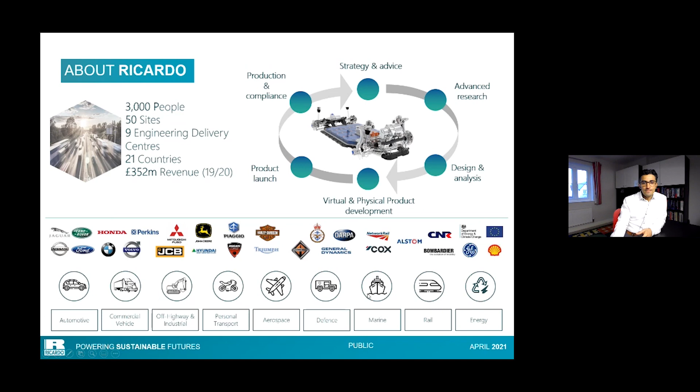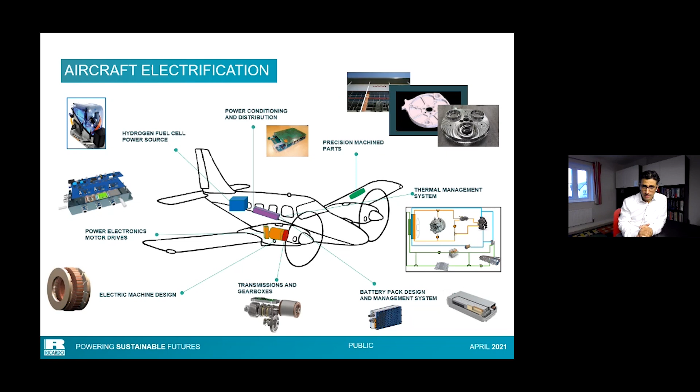Thermal management is very important, and I'll explain why that is in a few slides later. And the machining and manufacturing of precision parts that go into mechanisms that move the various flaps and ailerons and so on.

Why has this need arisen, and why now? We saw the car industry doing it in the mid-noughties, so that they could launch vehicles in the early 2010s with the Nissan Leaf and the likes. So what has taken a little bit longer for the aerospace industry to get on board the electrification bandwagon?

Part of the reason is that the components were not there at the time, but they are there now. There's government policy about limiting emissions that impact global warming, and more localized government policies around how we transport people. Some countries have banned short flights if there's an electrified train route, and as a result, some airline operations are quickly starting to invest in electric air mobility solutions. Aviation emissions account for 3% of CO2, but more like 5% of combined global warming effects once you include NOx emissions and contrails. And because they're at higher altitude, they may have a more severe effect on global warming than emissions at ground level.

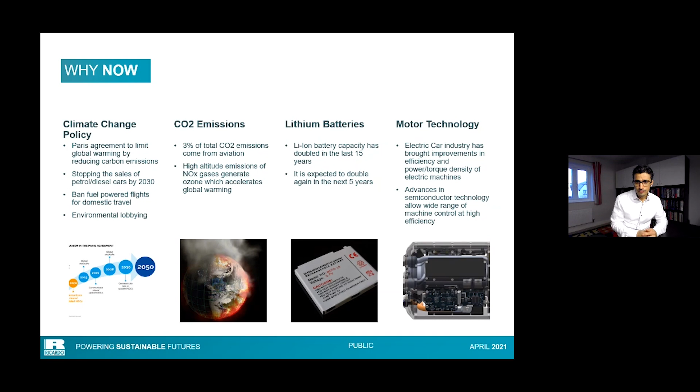The other thing that's happened is the motor technology and the power electronics to drive it. We've seen a very sharp increase in power density from those industrial motors that are the workhorse of our industries - bulky machines but reliable. When the car industry started electrifying, there was a big drive to pack more power into smaller volumes so they could fit as a hybrid or standalone electric vehicle. Initial aeroplane prototypes used those motors, sufficient for demonstrator flight. But since then, motor design has taken a tangent away from automotive designs, and now we're packing more power into a very small volume and weight - double the power density compared to a car motor.

The car industry is now going in a different course because they're more concerned about cost and security of supply for those motors, whereas the aerospace industry is more concerned about taking off the ground - we need light equipment, packing a lot of power into a small volume and small weight. All of those factors have now coalesced into the situation today, enabling the creation of electric aircraft and supporting the business case for electric aircraft operations.

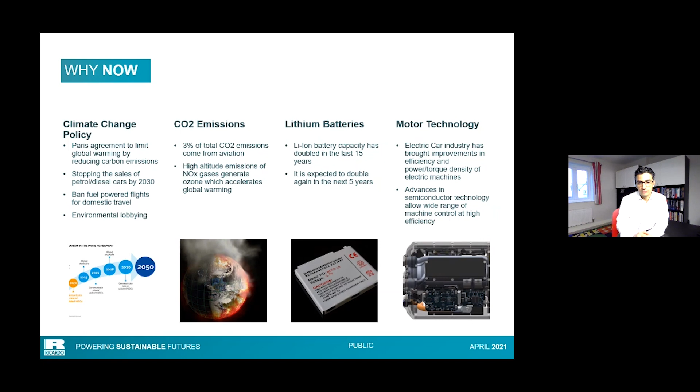So what is happening? Roughly speaking, initiatives can be broken down by range. We have urban air mobility, UAM, essentially transporting people within the bounds of a city or dense populated area. Think London with a number of hubs or vertiports - a hub at London Heathrow and one at central London. You get an urban air mobility air taxi that takes you from Heathrow to central London in about 5 or 7 minutes, compared to a train that takes 30 minutes or so. That's the general concept of urban air mobility.

Sometimes they call this advanced air mobility, because this type of aircraft can change from vertical lift into horizontal flight, using wing shape and aerofoils to create lift and lower the power demand on the battery and motors. Those are able to travel further distances, covering distances between cities - they call them intercity aircraft. Then we have regional aircraft that cover roughly a range of 300 miles.

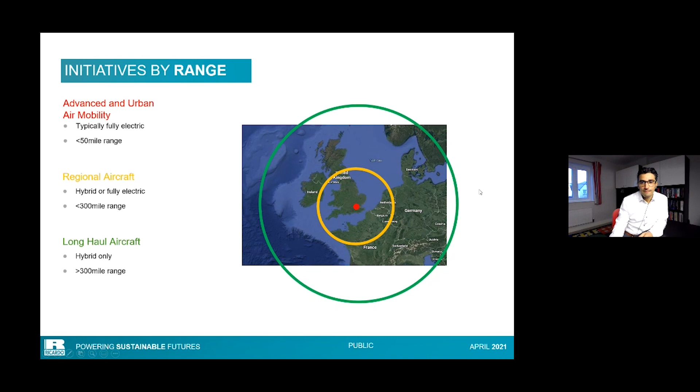And I'll talk a little bit about those hybrid aircraft. So the story started with a bunch of demonstrators, smaller aircraft which are easier to lift off the ground, and some specific purpose demonstrators to try to validate some of the technologies.

For example, we have the NASA X-57, which is still ongoing in the United States, and what they're investigating is the effects of having distributed propulsion along the wings. Obviously it's a conventional takeoff aircraft in this case, but they are experimenting with those wing shapes and the effects of having these distributed propellers along the wing. The general idea is also to test various fuselage shapes to try to optimize the aerodynamics of the aeroplane to make it specific for electric propulsion.

And then they have a number of cruising propellers and lift propellers. So the little ones are only on during takeoff. Once you are at a certain altitude, you only use the outer cruising motors.

Alpha Electro here in Europe developed this trainer - it's like a trainer aircraft for the pilot and one more passenger. It's very small, you can see there with just one motor, and that is fully certified now. So it was probably the first electric aircraft to be certified for passengers, for one passenger.

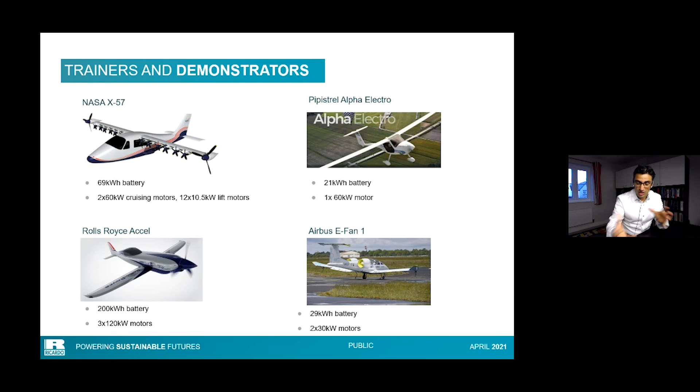They can build in high integrity and redundancy into the systems to make them safe. And now it's all a matter of building a business case around the routes that they can cover. Because being heavier, and maybe smaller, they can only go so far, and they need to see how that integrates with the rest of the transport network and start complementing areas where they can operate and make business.

So that is what leads us to the actual commercial developments. They're broken into various types. The ones that you see here transition between vertical hover and horizontal flight, and they are shaped in a way that they can take advantage of aerodynamic lift as they start accelerating horizontally.

And these two that I have in big pictures there are probably the 2 front runners in this race, and that's because they have a lot of investment poured into the coffers. Both of them have been floated - essentially they've gone through something called the Special Purpose Acquisition Company investment, and then floated in the stock market. And that has poured loads and loads of millions into their development programs.

So, roughly speaking, to get an aircraft of this type certified and operational costs about $1 billion.

So that is not a small sum, right? It is not money that will come from the UK government to demonstrate aspects of the technology. So that's how it starts. But to really get an aircraft into commercial operation takes a lot of money. It's not just proving that you can get an aircraft off the ground, it is proving that you can do so safely and repeatedly.

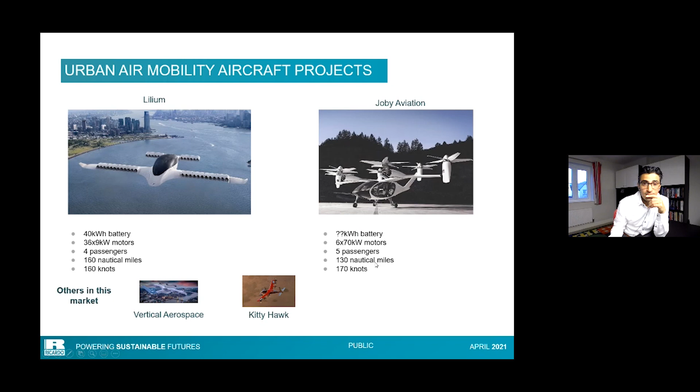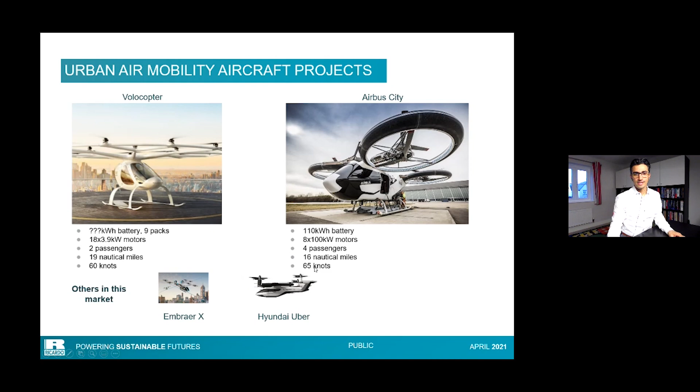So beyond the bounds of city travel, we have these regional aircraft. Now, Eviation is an Israeli company, and they have some operations in the US as well. And they built a number of these demonstrators, the Alice, and they've showcased it at air shows like Paris, and I think they came to Farnborough as well. So this is a larger aircraft. It can carry 9 passengers, and it can go a fair distance, 540 nautical miles.

It also carries a very heavy and large battery, which allows them to go that far. But now you can see that by having a clean sheet design in terms of the structure and the propulsion system, all the internal systems, they've been able to design an airplane that can service those regional routes. It is the only of its kind. The other ones on this page are conversions of the de Havillands or Cessnas, Britten-Norman, essentially by stripping out the fuel tanks and the engines and fitting in electric propulsion systems.

So that one there on the top right is the Harbour Air in Vancouver, where they stripped out the engine of the de Havilland. This is a Beaver version, and they fitted a Magnix motor. Magnix, you will see it later, is one of the new players in electric machine designs for aeroplanes.

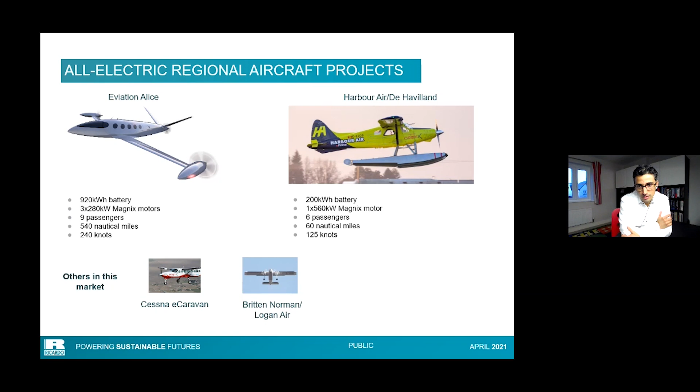Now, another company, also here in the UK, but also in the US, is Zero Avia with their HyFlyer version. This is like a smaller demonstrator. Their ambition is much larger, to develop a larger passenger aircraft. But again, in this case, Zero Avia are targeting aircraft with a hydrogen fuel cell powertrain.

And then you have others like Faradair, also here in Britain, and Zunum Aero in the US, who use conventional fuel or synthetic fuel, perhaps, again in a hybrid electric configuration.

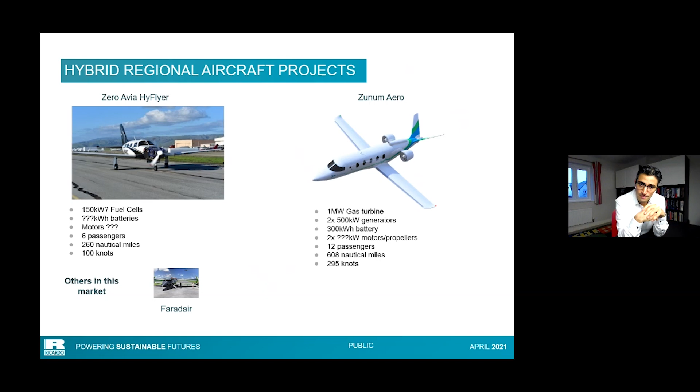Now, once it gets to long haul, there are not many players looking into it, because once you put your numbers in a spreadsheet, you realize that battery is not going to cut it, and I'll show you some examples of that. So they need a liquid fuel of some sort.

It could be synthetic fuel, but it could also be hydrogen, liquid hydrogen. Airbus are looking into various different concepts of hydrogen powered planes, either to burn it directly in hydrogen gas turbines to generate thrust, or having some hybrid parallel series configurations with some electric assistance. And Wright Electric, who pioneered at some point with EasyJet, also wanted to do a hybrid electric, maybe using synthetic fuels. At the moment, they've gone quiet. I think they're in the next round of funding, if you like.

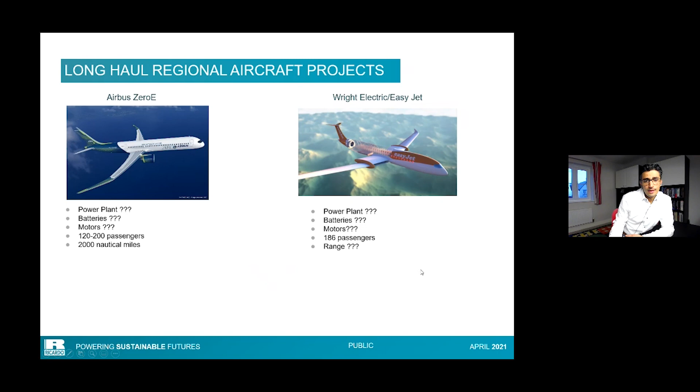Right, so let me talk to you about the technology behind these aeroplanes. What makes them unique? What are the challenges? One of the first things I wanted to understand when I started looking into this is, at what point do hybrid aircraft become necessary based on today's technology of battery cells and motors and so on?

I did some quick calculations on the energy required for small, medium and large aeroplanes to cover a route covering a certain number of passengers. So I have a small route there, London-Paris, 300 miles, flying at a speed of 300 miles per hour, carrying 15 passengers. And that roughly takes about 10 megawatt hours.

Then you have medium size aircraft covering a route like London to Milan, 800 miles, now carrying 150 passengers at a speed of 600 miles per hour. And that, you can see now, uses 60 megawatt hours. And the very large aircraft covering long haul routes like London to New York City uses quite a lot of energy.

Now, one thing that I've kind of quickly figured out is that none of these could be powered by batteries, because the amount of batteries you need to support that level of energy is quite large, and the weight would be quite big. So essentially, once you go past the 1 megawatt hour, roughly, you can no longer do it in an all-electric configuration with today's battery technology, and you need to start considering hybrid configurations.

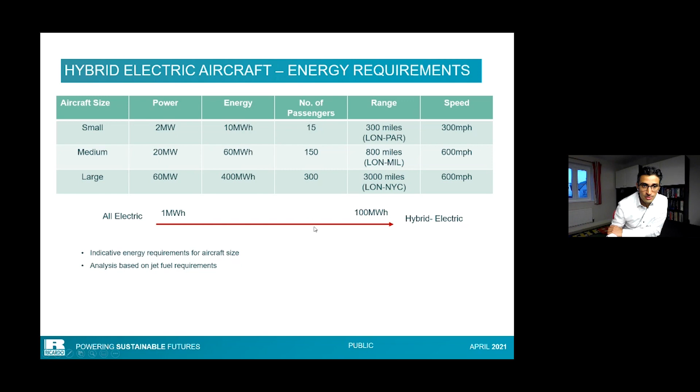So hybrid aircraft at a very simplified schematic level would look like that. This is a series hybrid with a gas turbine. I've shown a single gas turbine and electric generator. There could be two, one for each engine. But essentially, the principle is that you burn your fuel, either a synthetic fuel or hydrogen, in your gas turbine, which is coupled to an electric generator that generates electrical power and gets that power into battery banks.

And then you have that electrical network feeding into your two electric motors that drive either propellers or ducted fans. And all of this high power transfer is done at fairly high voltage to keep your currents down and your electrical losses down.

And the idea behind the series configuration is that you'd be able to maintain that gas turbine running essentially at just one operating point, which is the design point of maximum efficiency of that gas turbine. Now, as you'll know, thermodynamic cycles will limit the efficiency of that gas turbine to something like 40-50%. So a lot of losses will go there from converting the fuel into electric energy.

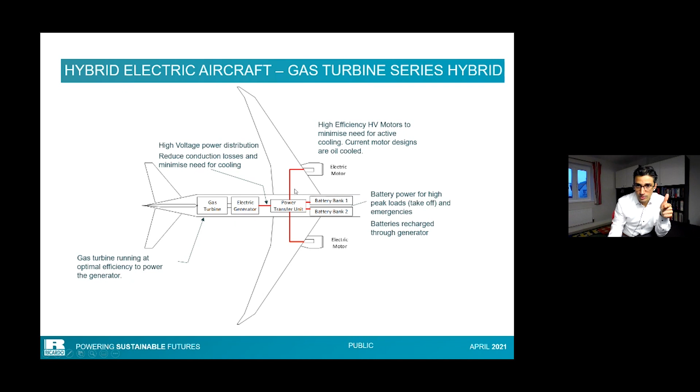Whereas the electric motors are more efficient in a wider range. They can operate 92 to 96% efficiency over a wider range. So that is the general principle: you operate your gas turbine at one very high efficiency point and let your electric motors run at a wider range at high efficiency.

Now, the series configuration can also be done with a fuel cell. So you still have your hydrogen tanks, but now they feed into the fuel cell, which generally operates at a higher efficiency than a gas turbine. You could be hitting your 60% efficiency. And again, you run that at high voltage to keep your losses down, and the rest of the powertrain is the same.

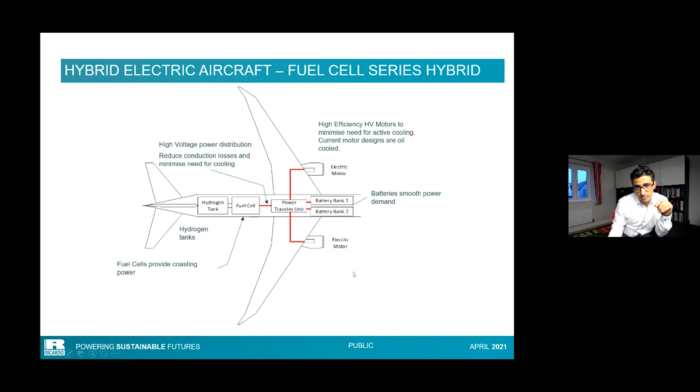In a hybrid configuration, you have your gas turbines directly coupled to your ducted fans, but you have them mechanically coupled to the electric machine. So you either burn the fuel and generate propulsion from there, or you can power it from the electric machine, or you can do both. Both can input power into the shaft that drives those fans.

Now, the general idea on a hybrid parallel configuration is that you can use your electric machines to get you off the ground at the airport, within city boundaries, where you want to keep your noise down and your pollution levels down, and then you use the energy from your battery banks.

You get off the ground, you reach cruising speeds, at which point the engines take over. You start burning fuel, but now at a higher efficiency level because you're in cruising speed, and you can use some of that power via the electric machine to recharge your batteries. So overall, the whole ground-to-ground mission profile of emissions is lowered because you maximize the use of electrical energy when you need it most, and keep your gas turbines operating efficiently at cruising speeds.

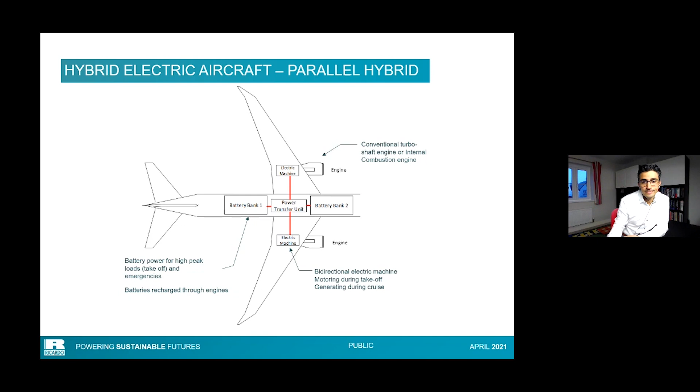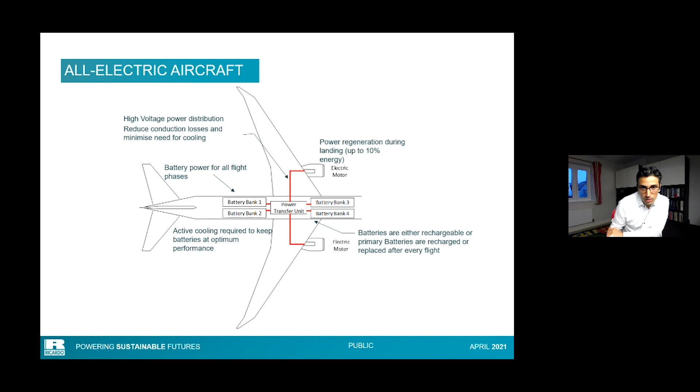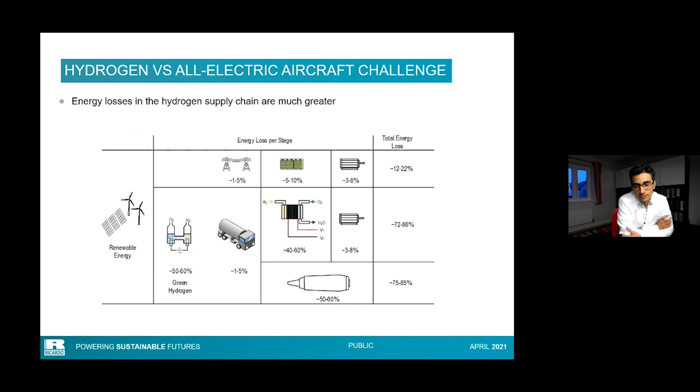Right, so just a little bit of thought behind electric versus hydrogen, and whether we should really be looking at electrifying even long-haul aircraft longer term. And this hopefully will give you some perspective of how we use energy.

Now let's assume we are going towards an environmentally friendly society, where we don't want to be generating emissions that contribute towards global warming. We get all our energy from renewable energy, like solar panels, windmills. It could be wave, it could be tidal, and potentially even nuclear - why not? Some countries are doing it. And you use that energy to generate your green hydrogen. I'm not going to go into the details of the various colors of hydrogen, but suffice it to say that green hydrogen is hydrogen produced by electrolysis using energy that has come from renewable energy, like solar or windmills, and therefore does not generate any emissions.

Now, that electrolysis process is usually about 40% efficient, so you will lose - these percentages are energy lost - you lose 50 to 60% of energy in that process. Then it'll be transported, maybe pipes, maybe tankers, lorries, and there will be some leakage in the fueling and extracting of the fuel and so on. 1 to 5% of energy will be lost there.

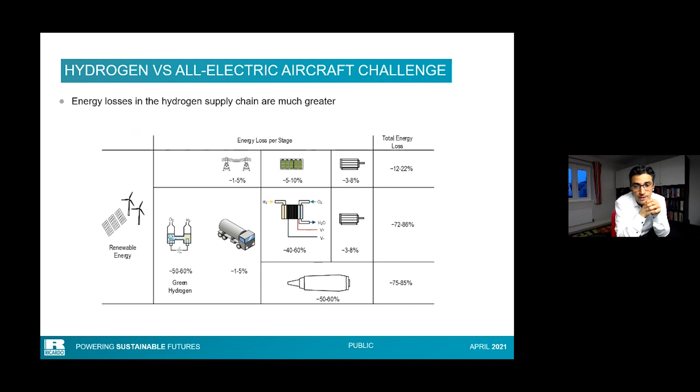Right, let's carry on.

So I did a little bit of research on what is happening in battery world, and there's a lot of research groups out there investigating all sorts of chemistries and materials and approaches. Most of them tend to revolve around lithium. Some people looking at sodium and some looking at aluminium batteries, but most of the efforts are around lithium and various approaches with lithium.

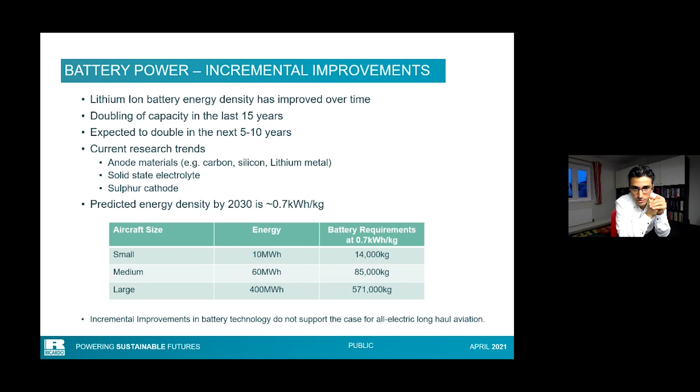There's research around the materials that go into the anode, research on solid electrolytes which I'll explain in a minute, and research on lithium sulfur. Lithium sulfur promises to give us energy densities of about 0.7 kilowatt hours per kilogram, and even with that energy density, it just doesn't add up. We cannot get this aircraft off the ground with those energy densities. So is there anything else?

Well, there is something else. Some people are looking at lithium-air batteries. This works almost like a fuel cell, where air, specifically the oxygen in the air, is fed through to the cathode, and you have the pure lithium metal in the anode. In those configurations, you can achieve energy densities theoretically between 3.5 and 11 kilowatt hours per kilogram. Now 11 kilowatt hours is getting very close to jet fuel energy densities. It's very unlikely we'll get to those levels, but let's see what happens if we feed 3.5 kilowatt hours per kilogram into our table. Now you can see that those weights start to become more reasonable.

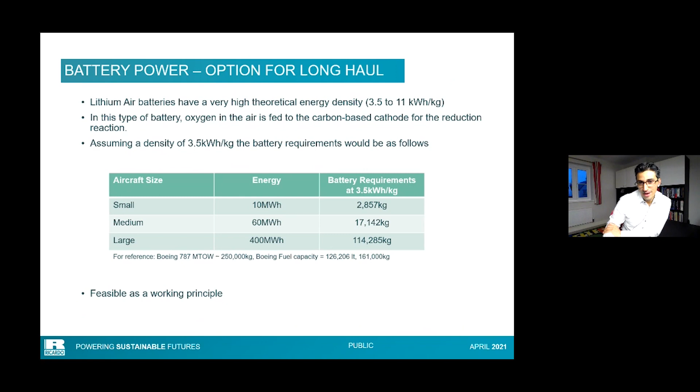As an example, just to ground this: a 787 maximum takeoff weight is 250,000 kilograms, and it can carry a fuel capacity of 161,000 kilograms. Well, a large aircraft with batteries that achieve this energy density would need 114,000 kilograms. So it will work if we can get these lithium-air batteries sorted, and that is not an easy feat.

So what is the issue with lithium-air batteries? As I said, you have lithium metal in the anode, and when it discharges, it releases electrons that flow through the load, and they recombine with the oxygen and the lithium ions that migrate across the solid state electrolyte to form lithium peroxide. The oxygen comes from an intake of air, which will have other gases, not just oxygen, which may degrade the cathode material. So that's the general principle.

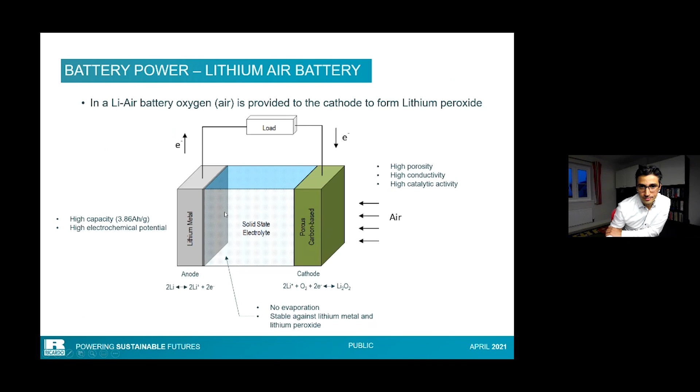Now, this lithium metal is incredibly reactive, and it could become explosive when in contact with water. Most conventional batteries will use a gel electrolyte, some water-based electrolyte. So when you have a water-based electrolyte and a lithium metal anode, no, that's not a good combination. That is not a safe cell. That's where the solid electrolyte comes in. If we can make that solid, as some researchers are currently looking into, then that junction between the anode and the electrolyte becomes feasible.

There's other issues. So far, all the demonstrators have a very short cycle life, maybe 10 charge and discharge cycles, which is not great. The oxidation and reduction rates are fairly slow, which means the cell cannot provide large amounts of current, like peak current, as you see in lithium polymer cells. So it's a cell specifically made for energy rather than power, and sometimes in parts of the mission profile you need high power to get you off the ground, for example. So again, just a complication in the configuration of the number of cells you'll need in parallel to achieve a certain power level.

As I said, some presence of other gases in the air mixture can degrade the cathode. And to date, all the demonstrators have been running at fairly low efficiencies of around 70%, compared to 96-97% of lithium-ion cells. Dendrite formation in the anode can short across the electrolyte, typically in a wet electrolyte or a gel electrolyte—that can easily happen. With a solid state electrolyte, that may be more difficult.

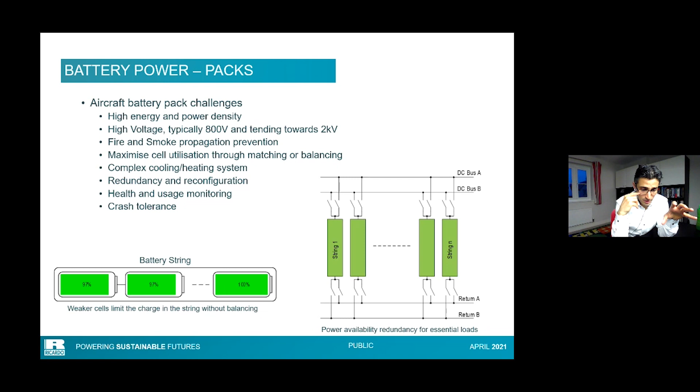We also want to maximize the energy available in the pack to use. The issue is that cells from the manufacturing line naturally come at different energy capacities due to tolerances. So they can be matched at production by running charge-discharge cycles, selecting cells that are fairly equally matched, so that with our pack level battery charging system, they follow the same charge and discharge profile.

Over time, cells will start to drift based on tolerances and perhaps slightly different hotspot temperatures across the pack. If a cell has a degraded capacity, lower than other cells, as the battery pack charges, once that weak cell reaches its terminal voltage, it will force the charge system to stop, otherwise it would overvolt and create a hazard.

Essentially what that ends up with is a battery pack with hundreds of cells in series, and all of them but one maybe at 97, 98% when one has reached 100%. And that's not great, because that accumulates over hundreds of cells.

So what needs to happen is active balancing. One example: as the cells are charging, the weaker cells that reached 100% faster get actively discharged, so the voltage drops while the remainder carry on charging. Once they reach 100%, all of the cells reach 100% at the same time, giving you the maximum available capacity from that battery pack.

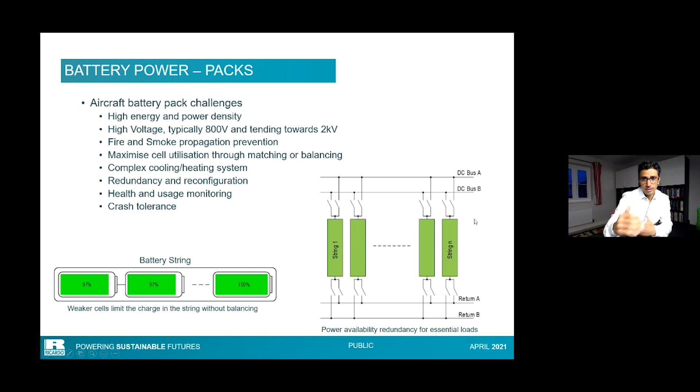When it comes to charging, the same challenges we've seen in the automotive industry map across to aerospace. To have fast turnarounds of aircraft, we could have battery swaps: the aircraft lands, the whole pack comes out, a new fully charged pack goes in, able to fly within 5 minutes.

There could be onboard charging for general aviation small aircraft that fly to landing strips in remote places. You may want to charge using your standard electricity outlet, so there may be an onboard slow charger - just land, charge it overnight, and fly the following day.

Or there could be high power fast chargers in vertiports and hubs, similar to what we've seen in the car industry - several hundreds of kilowatts being poured into your battery pack for about 15 minutes, allowing the pack to charge to about 80%.

Good. Right, let's talk about electric propulsion.

As I said at the beginning, most of the initial efforts exploited the developments in the car industry, as motors became more power dense. But they have diverged since, and now we are seeing aircraft exceeding power densities of 5 kilowatts per kilogram, compared to about 2 or 3 for cars. 4 kilowatts is the highest I've seen in a car.

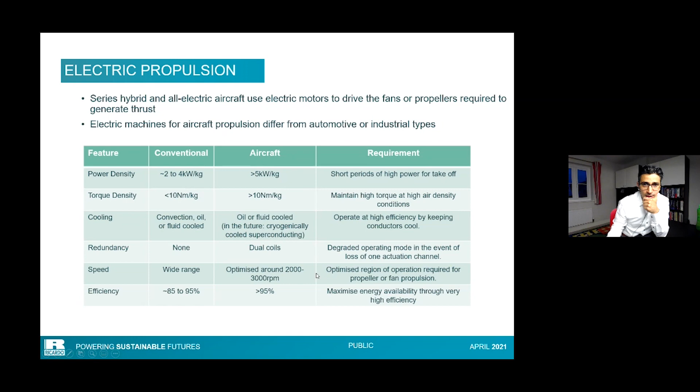That gives you a fairly high level of redundancy. Now, those coils operate in synchronism, and when they are all operational, you have full power available from that machine. And when a fault develops, all these coils are independent from each other, and the drive systems will be independent from each other, so they can decouple one of those paths and carry on operating with 3 coils at 75% power rating.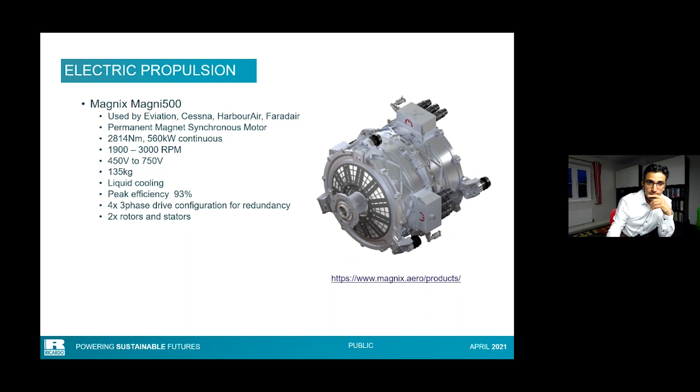This is another example from YASA, which is a UK company. Now, in this case, this motor design is an axial design. So this is fairly new. It's not new in that it's been around for 10, 15, maybe 20 years, but much newer than the radial flux machines that we've seen for hundreds of years.

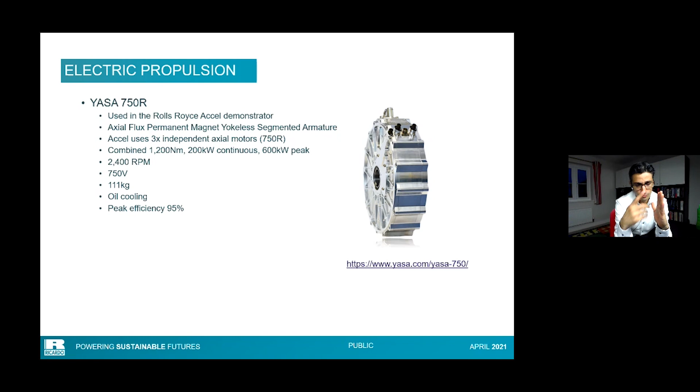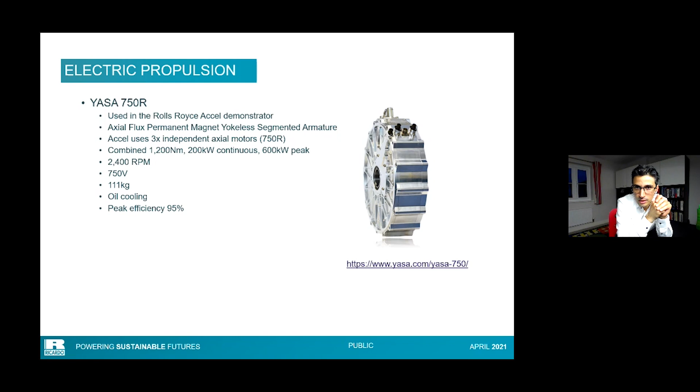What they can do is that there's 2 configurations, but to keep it simple, you have your rotor with your magnets, and you have your set of coils establishing a magnetic field in the axial direction, along the length of the shaft, if you like, and the magnetic path is fairly short compared to the radial motor, and that makes it very efficient, and they can pack a lot more power into it in a small volume. So it is a good solution for an aerospace application, and this is the type of motor that Rolls-Royce use in their Accel.

And as I said, they can also stack multiple units along the same common shaft, and with each section you have a set of coils. So you stack multiple ones, and you start building your redundancy and your power level at the same time.

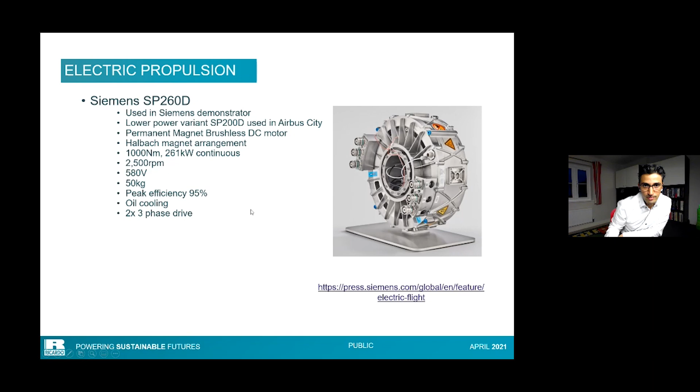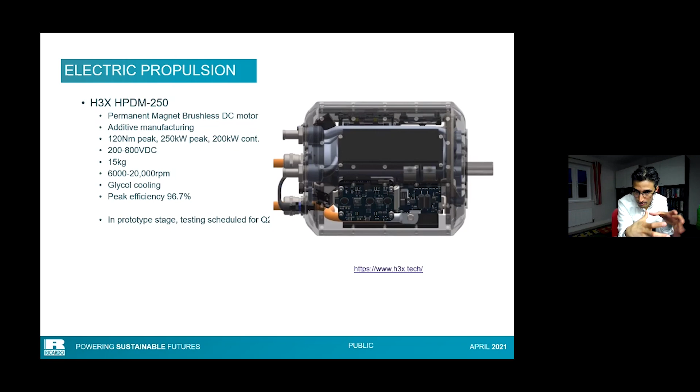This is another one from Siemens. This is standard permanent magnet motor, and another one from H3X. This one in particular is from a startup company in the US, but they're claiming very high power density levels, and the way they've achieved this is by using additive manufacturing techniques, where they print the coils and the stator of the machine, and that allows them to have geometries where they can pack a lot more of the materials compared to a regular wound stator.

Now the electrical diagram of a dual coil motor would look like that. So you have full galvanic isolation between two different drive units and the coils. So a fault in one of the coils or the drive system cannot propagate to the other system. And when both are operational, then they can operate at a 30-degree phase shift from each other, which has benefits on the DC side, as it makes the harmonics much lower.

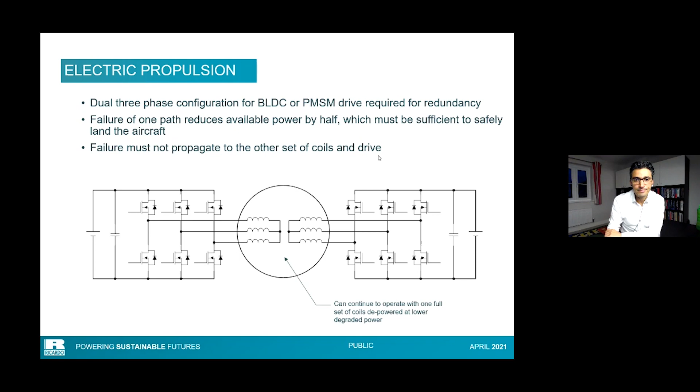So a little bit on power distribution. I've been mentioning a lot that we like to operate at high voltage. Just to put that on the ground, most cars have a powertrain running at 400 volts, but in contrast, most electric aircraft will operate at 800 volts because they can achieve lower losses in the wiring. They can use thinner gauges in the wiring and make the whole system lighter.

Now, in a conventional system, you'll have a symmetric aircraft design where you have your left and your right bus, and you have DC bus ties with contactors. So you can isolate a fault in one of the sides of the aircraft, and then route power through the bus tie from the other side of the aircraft, and maintain a certain level of integrity.

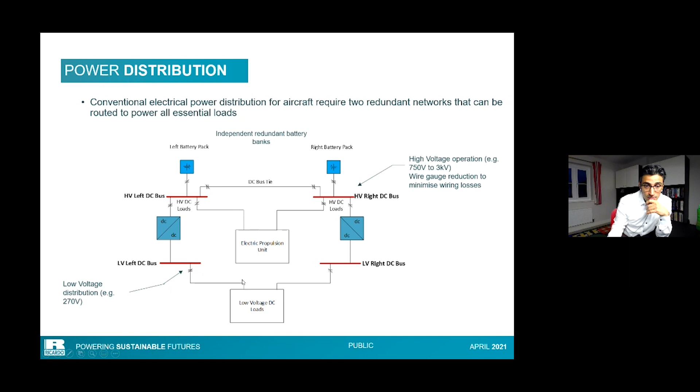Now, what's happening with the multi-rotor aircraft is that they no longer need those DC bus ties because they have so much redundancy in the system. So they can fully isolate a whole powertrain from other powertrains. So you can think if you have 8 rotors in your aircraft, maybe you only need 4 fully independent powertrains, and each of the high voltage buses powers 2 propulsion units, or combinations of this.

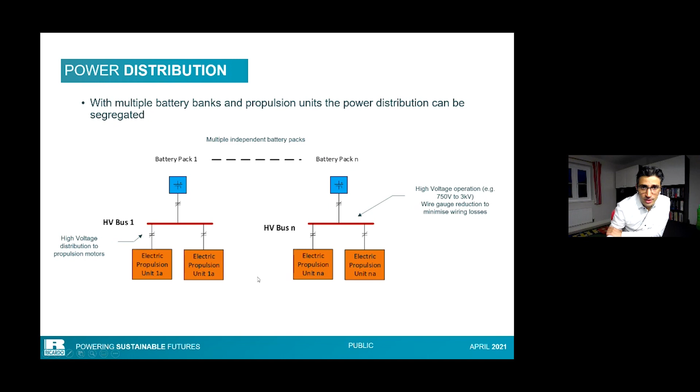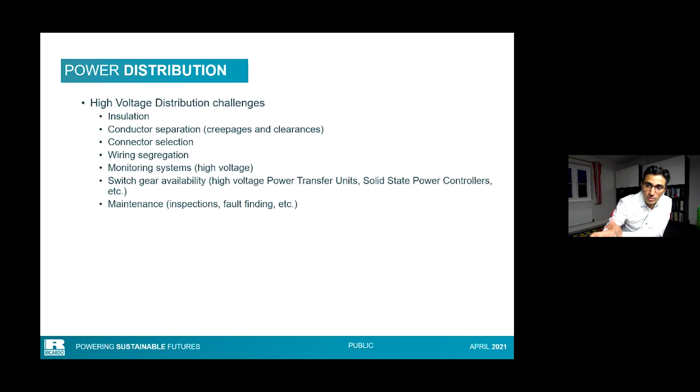Some of the challenges with high voltage distribution are the insulation, conductor separation, connector selection, the wiring, and also the coils in machines become more difficult to manage because the insulation needs to get thicker, so you may not be able to coil as many turns around the stator teeth. Monitoring systems need to become high voltage, switch gear availability may no longer be off the shelf. They'll have to develop new contactors and so on.

Now, I've talked a lot about the propulsion system, but there's also the whole electrification of the aircraft and the removal of other non-electric components. So as you will be aware, conventional aircraft rely a lot on hydraulic power to move flight surfaces and structures like the landing gear or doors. And we've seen a drive towards electrification, even in aircraft like the 787 and the A350.

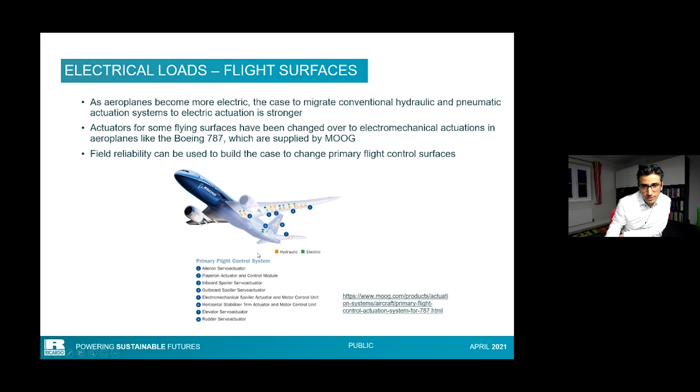Now here's an example of what has been changed to electric in the Boeing 787. So you have some flight control surfaces that have been electrified. There's doors, there's landing gears, there's braking systems. This also on the 787.

Now the drive for this braking system was that you have hydraulic fluid, which is flammable, close to the pads that generate a lot of heat as they engage, right? So a leak on the hydraulic lines could generate an explosion as those pads come into action. So turning into a fully electric system eliminates that problem completely.

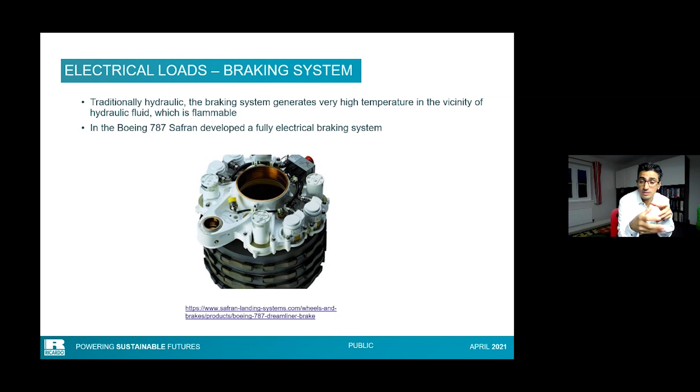There's various pumps. Now in an electric aircraft, you may not have hydraulic pumps, but you will still need your thermal system and your environmental system. So you will need maybe liquid coolant to be pumped around your battery and your motor and inverter, and obviously all the pneumatics required for the environmental system in the cabin.

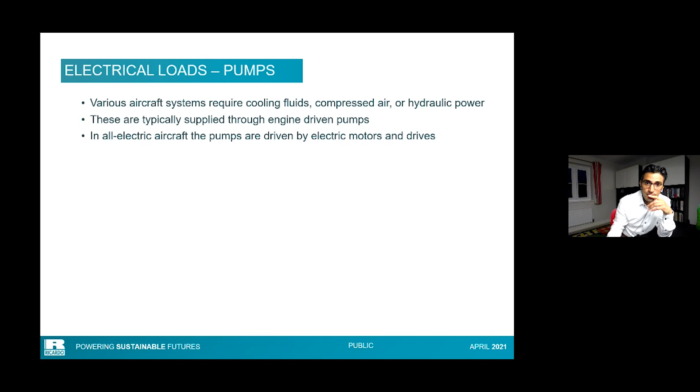Another load that's required in aircraft that fly in icing conditions is to keep the wings and the leading edge of the vertical stabilizer and the wings free of ice, so that you don't lose aerodynamic performance. So in the 787, this was done with an electrothermal system, where they have heating elements along the edge of the wing, and they can circulate power to keep those wings ice free. So again, something like this could be done for the all-electric aircraft.

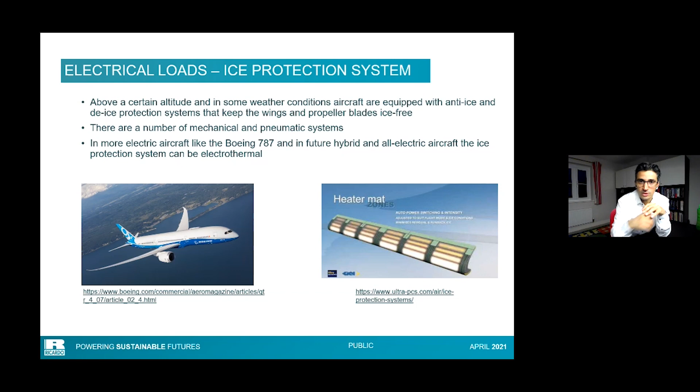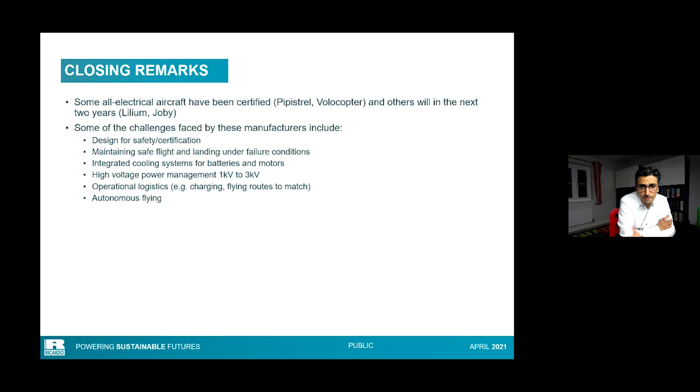So that brings me very close to the end of my talk. There is a lot of activity around urban air mobility and regional hybrid and all-electric aircraft, and it's certainly changing the way we see aerospace and making the aerospace industry more environmentally friendly. There are challenges, and those challenges are being tackled one at a time, and I'm pretty sure that we will get there. Some of these companies like Pipistrel and Volocopter have already done so by certifying their aircraft. Others will follow. Lilium and Joby are the next ones in line, but we will get there.